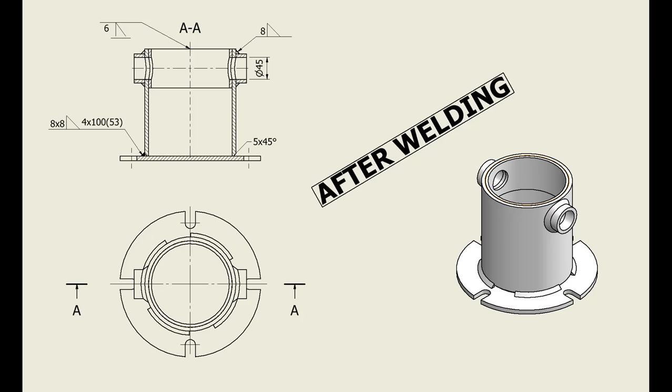Hi my friends, today we'll discuss welding.

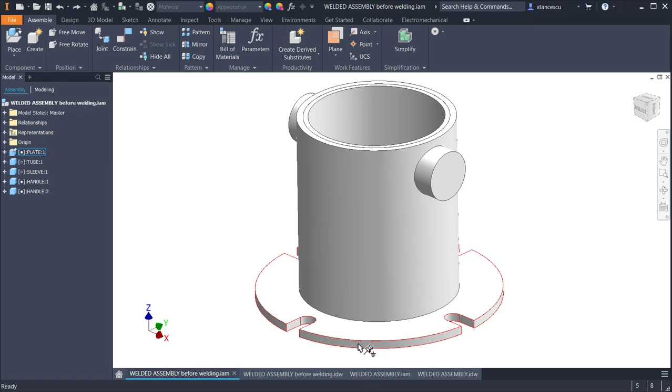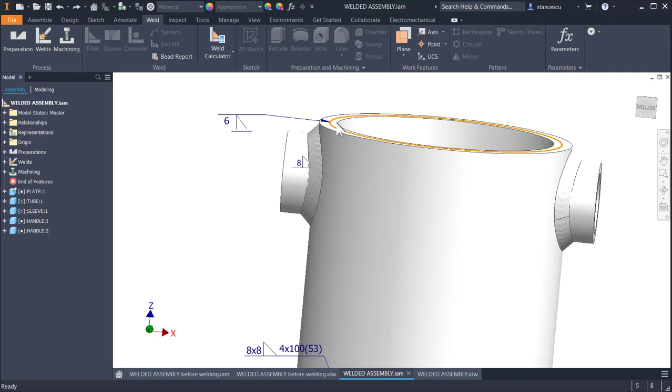This is an assembly which needs to be welded, and the final will have this welded assembly which has some welds at the bottom, some welds here, and a cosmetic weld which doesn't add material to the assembly.

The drawings are two: one is before welding, this one, and another is after welding. The assembly has 5 parts: a plate, a tube, a sleeve inside this, and 2 handles.

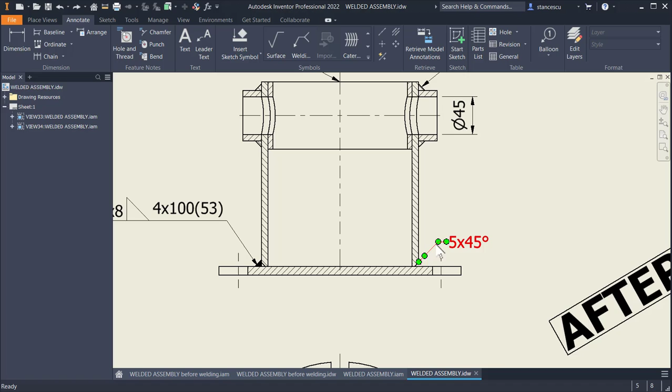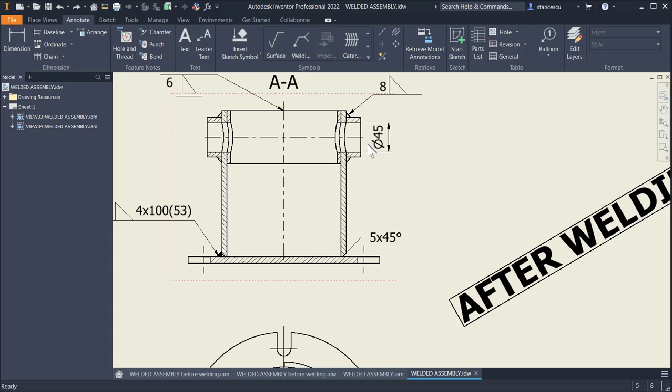I want to show you that we can apply preparation of the parts before the welding, and we also can apply machining after the welding. So we have 3 possibilities: one is preparation, another is welding, and the third is machining. We'll see how to make all this.

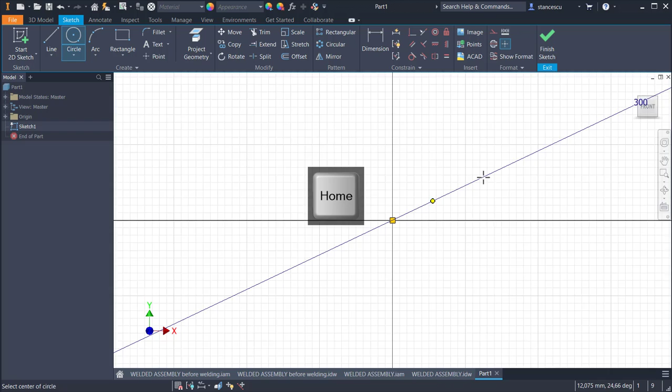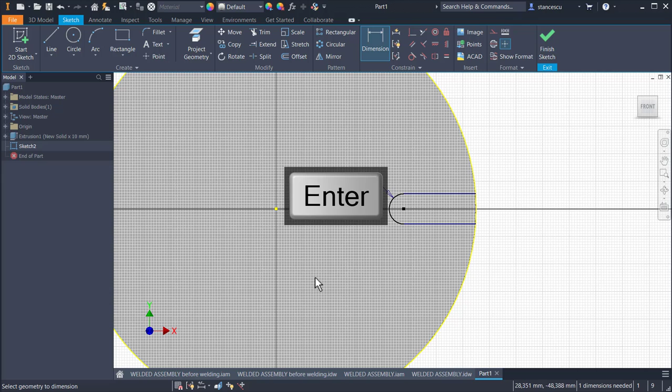Let's start with creating the components. Dimensions are here, so we can start. We start with the plate, and I'll go speedy to this part. You see, I create a circle, I extrude the circle on 10 millimeters, then I apply a cut by using the dimensions in the drawing, of course. 22 divided by 2 is the radius. Four cuts are there.

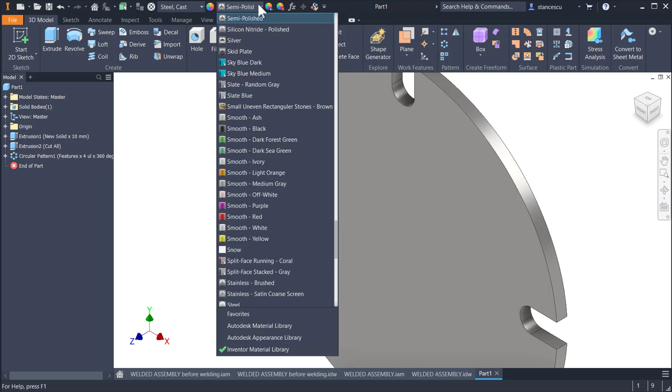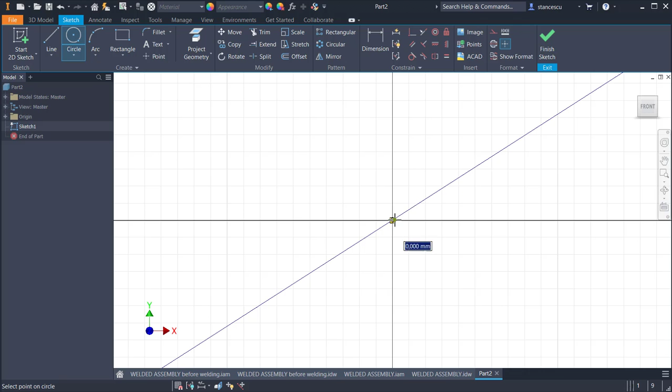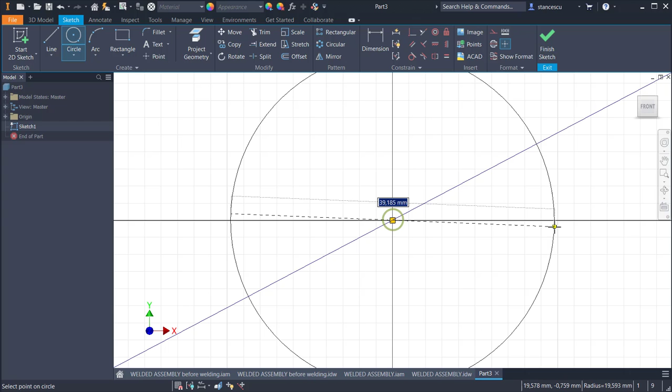Then I apply the material, which is steel cast, to both material and aspect. I create names for each of the 4 parts. One is in 2 instances, the handle. I create the parts with names having the suffix after, and this is not after the welding, but after we have created them, because the names plate, and not plate after, for instance, were the names of the demonstration

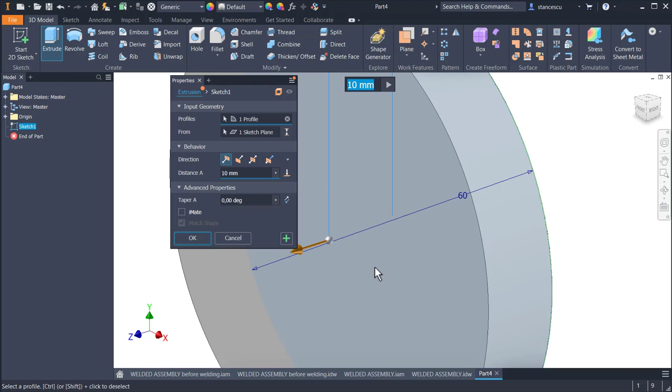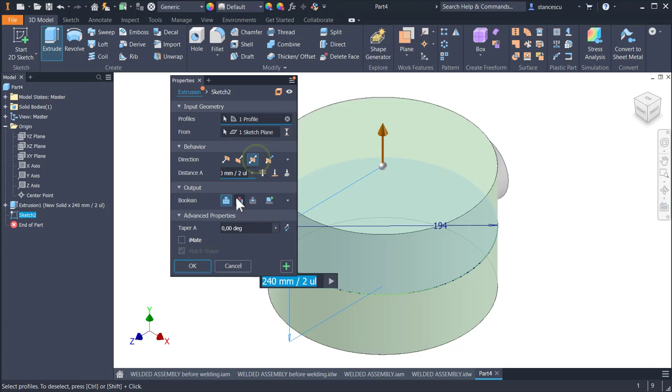assembly at the beginning. You see, each one has the name after: sleeve after, handle after, plate after, and tube after. All of them will be used to create a new assembly, which is also called after, but this is not connected with the welding. This is before and after we create the components and the assembly. You see, the handle has a curved face.

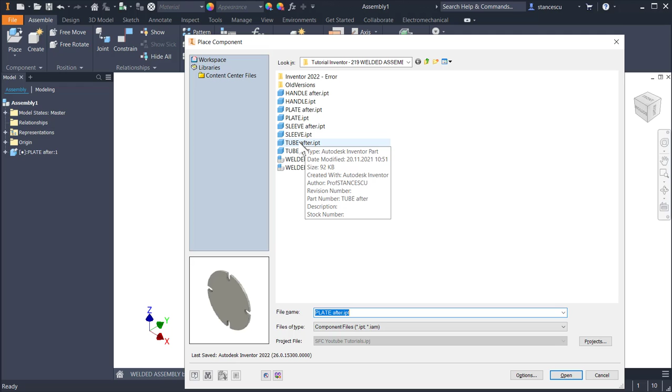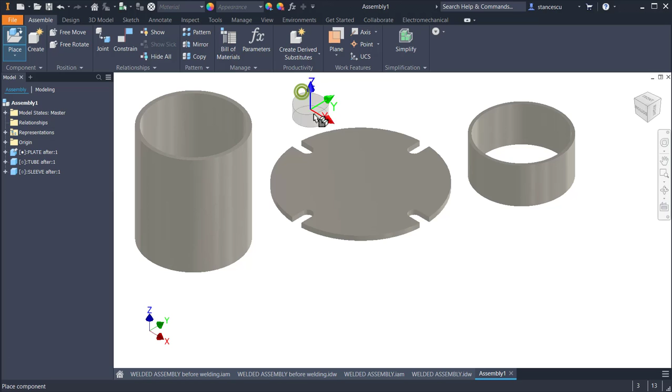Now we create the assembly. The assembly is this one. We start with the standard millimeter IAM. Place. The first is the plate, but the plate after we created, not the plate used as a demonstration at the beginning. Plate after. Placed, grounded at origin, escape, space, because I want to repeat the place. Tube after, somewhere outside of the plate. Escape, space. Sleeve after, escape, space, and twice for the handle after.

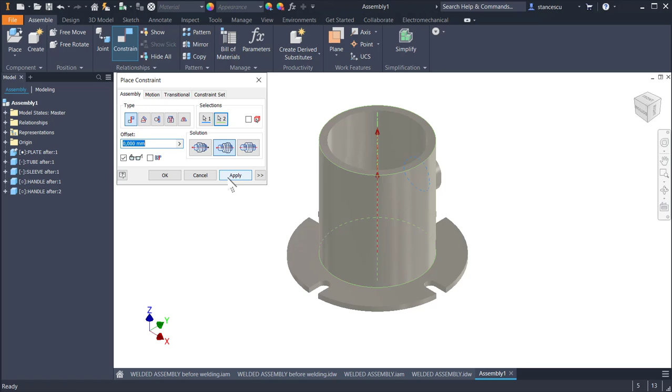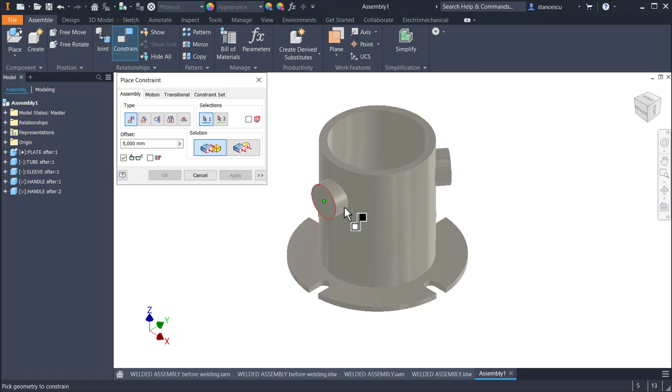We apply constraint, insert bottom face with the plate, apply, then aligned for the sleeve inside the tube, then mate the axis on axis, apply, then axis on axis, apply. As you can see, these two are on the same axis with the tube. I place them on the same axis, this axis, to be aligned with this axis.

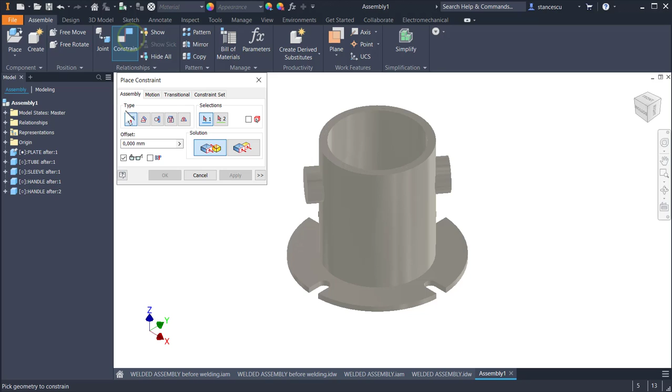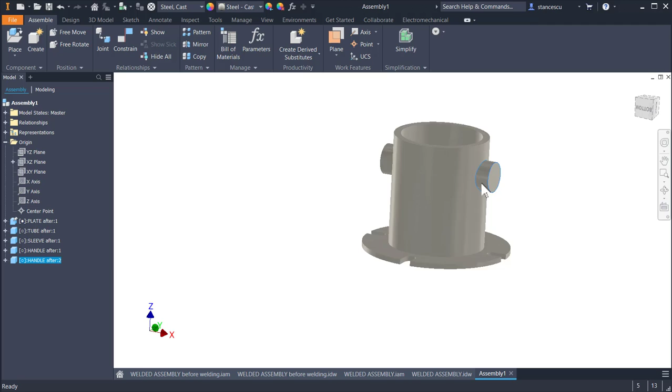Now we have the two very well placed on the tube. I put them aligned with this plane, so I apply constraint, selecting that plane. This is the plane, and then I select the point. Yes. Okay. What do we have now? We have the handles placed aligned with the plane. The drawing shows us the distance. The distance is 190. Be careful, I added this 80 because it was mixed up by me. Excuse me. So 190 from the bottom.

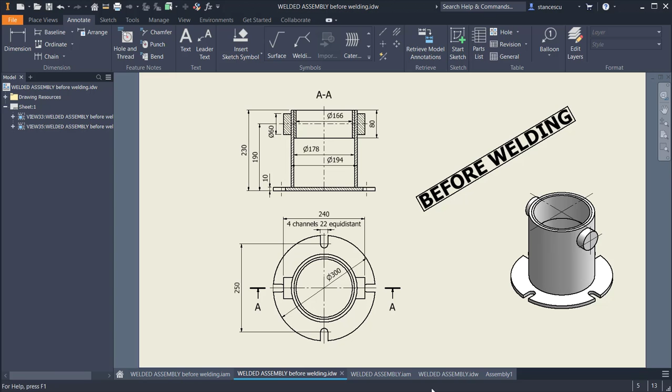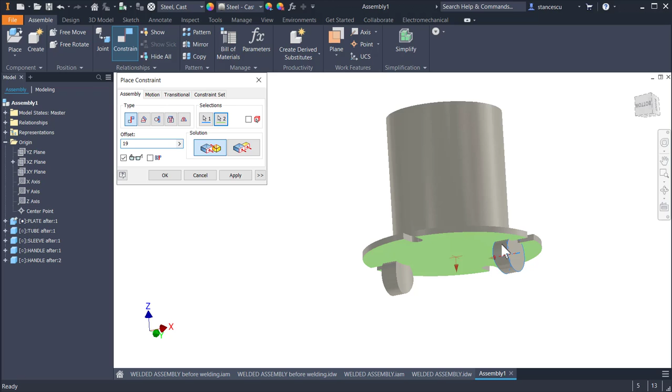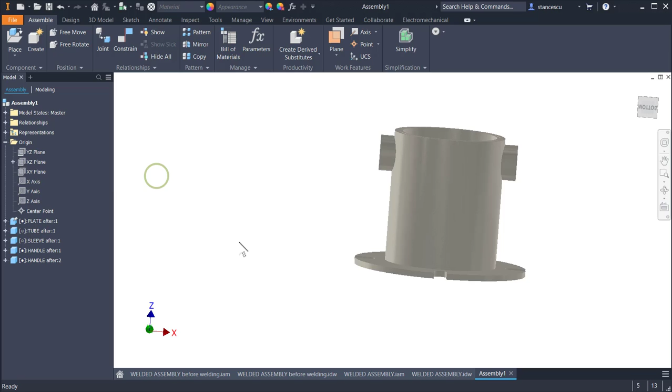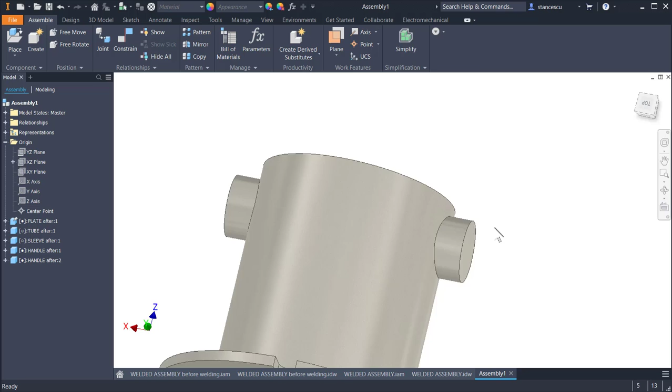I go to the new assembly, constrain this axis about this face at, I write here, 190, and I see that this is going down. I don't want this. I go back here, home, minus, and now the dimension 190 is up. Good. F6. I like to see the edges, so I go to visual style and I select shaded with edges. Now we see edges. This is the assembly to be welded.

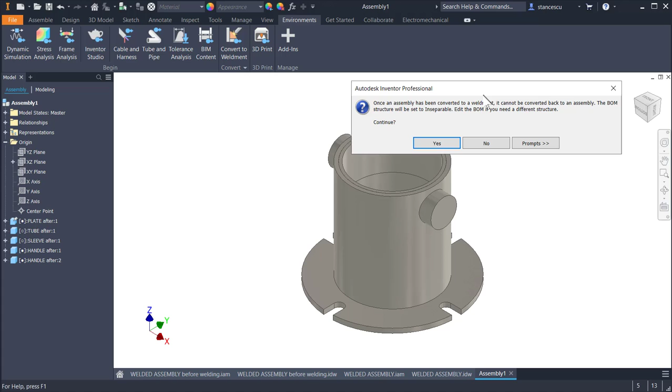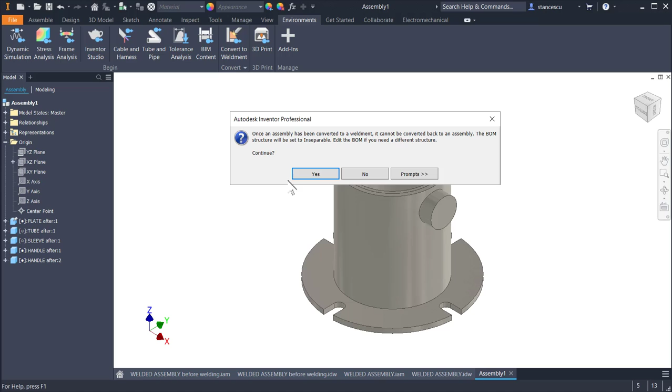Good. Since we have the intention to weld these parts, we go to Environments, convert to Weldment, and we receive an important message. Once an assembly has been converted to a weldment, it cannot be converted back to an assembly. The BOM, bill of materials structure, will be set to inseparable. Edit the BOM if you need a different structure. Continue. Yes, I want this way to convert the assembly to a weldment. Yes.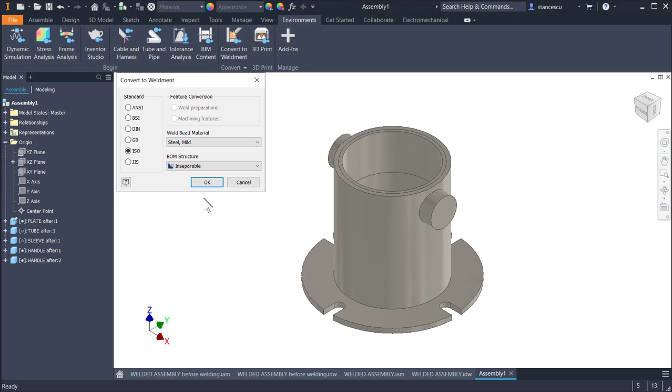What material for the weld bead do you want? I want ISO and I want steel mild. Not aluminium, not alloy, steel mild, usual for carbon steel. The BOM structure is inseparable. You can select other options, but inseparable is our option now. Okay. Now we have the tools for welding. As I said, the most important are preparation, welds and machining.

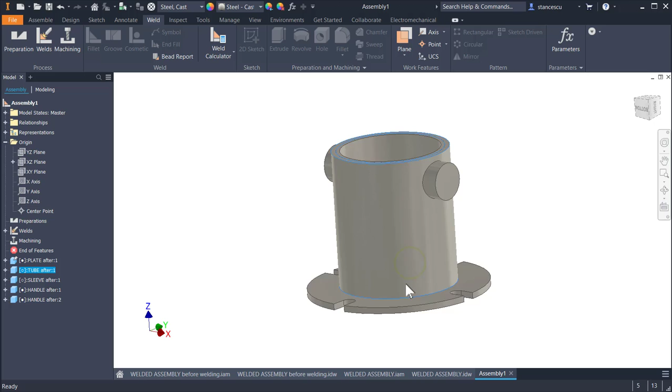I want to chamfer this component, the tube, at the bottom with 7 millimeters. So I select preparation. You see that we now have an end of features here. So we create features between these two lines in the browser. What do you want to do? I want to create a chamfer. Which edge to be chamfered? This. 2 millimeters? Not 2 millimeters, but 7 millimeters.

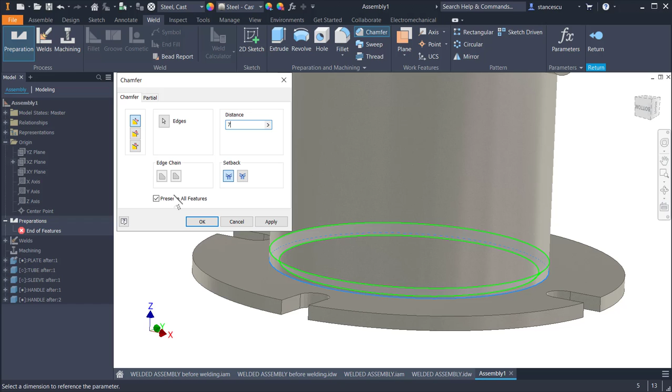Okay. Now, as you can see, I have a part with the chamfer. Do you want to create some other preparation features? No, this one is all I want. Good. Then I go back and I select welds.

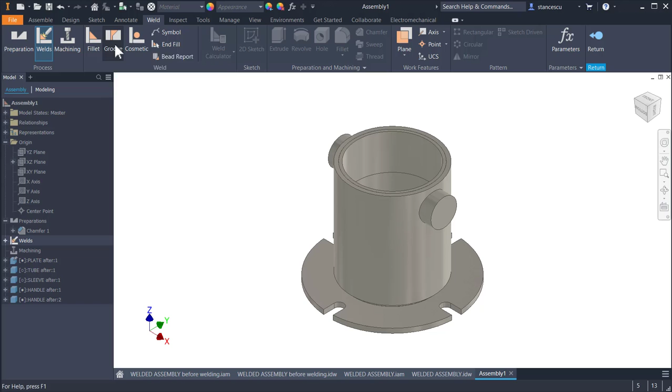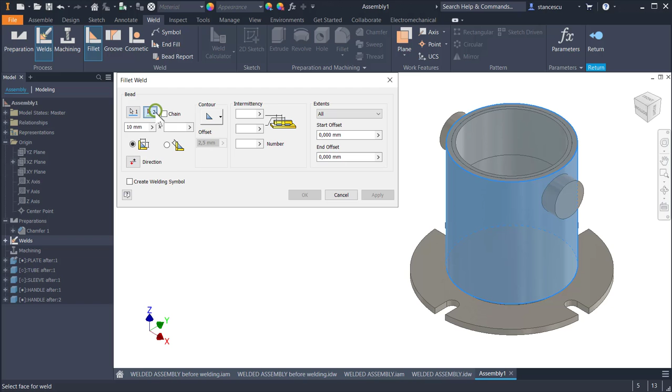I have now 3 options: fillet, groove and cosmetic. I select fillet. Why? Because I want to apply weld between this face and the handle. One selection is the first face. The other selection is the second face, but both of them can be more than one. One face, one component is number 1 set and it is selected, and the second one is this and this.

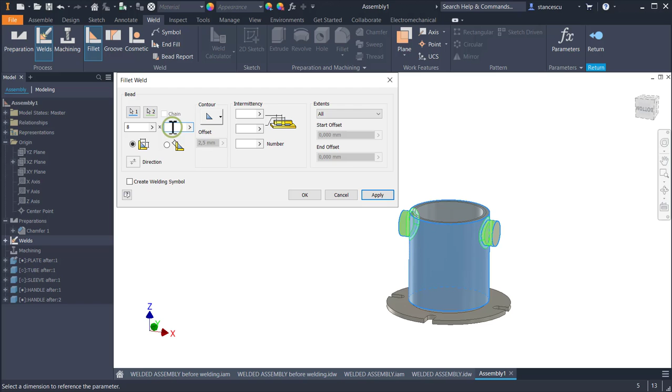So we have 2 faces for the second set of faces. Good. Now I place here my dimensions, 8 millimeters and also 8 millimeters. The other one, not 10, it was too large. The first.

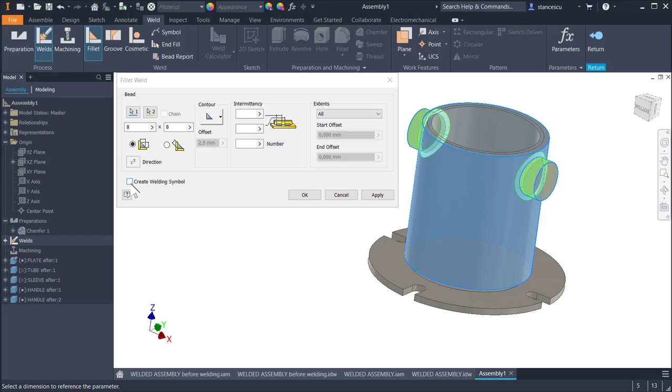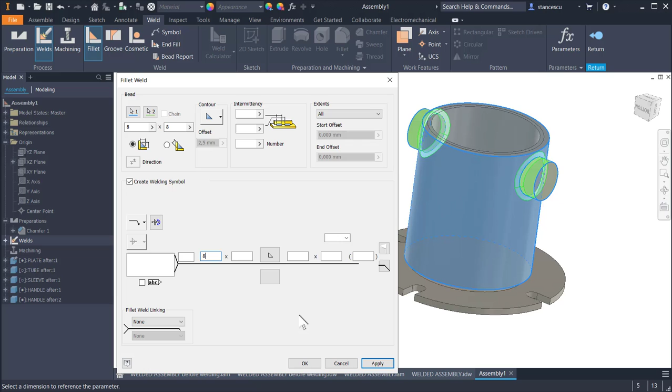And I want to create also symbols for my weldings, or welds. Create welding symbol. I place here 8, and this is enough for the fillet weld. That's all. Okay. You see, we have a symbol here, and we can use this symbol in the drawing when we create a drawing for the welded assembly. Good.

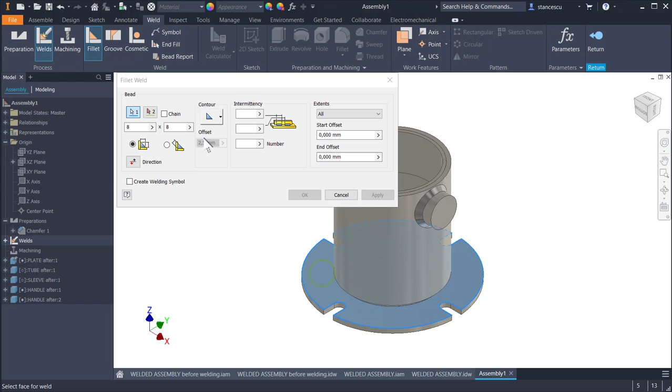Do you want to create another weld? Yes, sir. I want to create a weld at the bottom, not continuous, but intermittent. What kind? Fillet. Good. I still leave here 8, but the first face is this one. The second face is also only one face, this one. And now you see the future weld. I said that I want it to be intermittent. I place here the length of each bead,

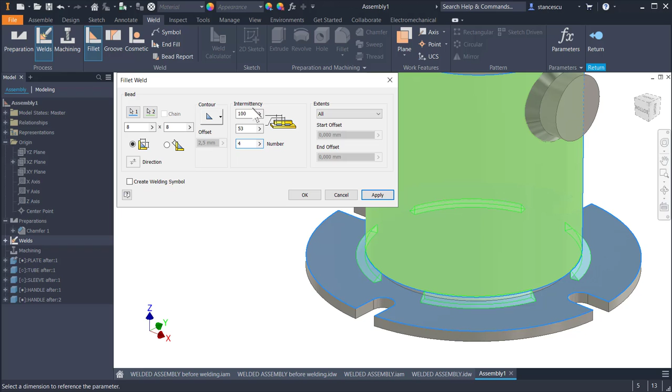53, not 100 is the first, 53 is the second, and the number is 4. I want to have 4 weld beads. Length is 100 and spacing, the space is 53. Symbols, yes, I want to create symbols.

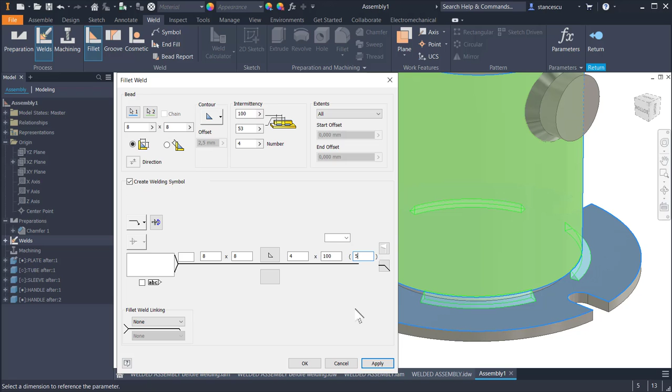I place here 8, also 8 here, then 4, 100 and 53. Okay.

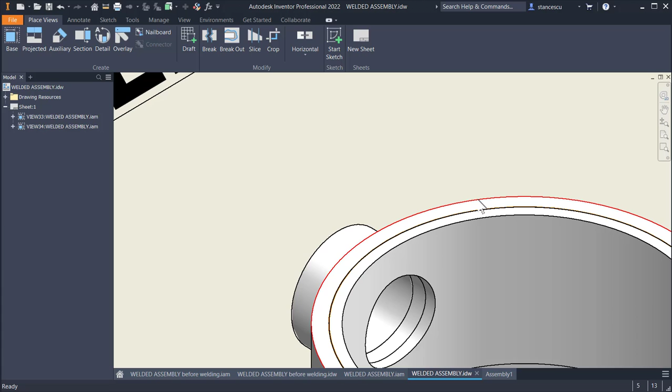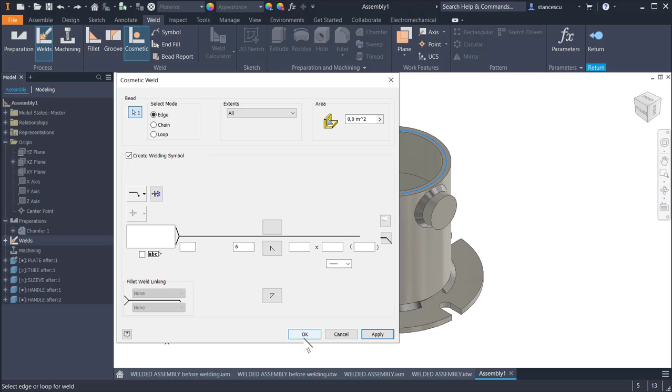Next is the cosmetic weld, which is this one. You see, here is a special weld. To do this, we select cosmetic, the third option, and an edge, this one. But we want to create also a welding symbol. The welding symbol has none up, but a symbol down. This is the symbol. The value is 6, chamfer, and another option is a simple line. Okay, we see that we have a new symbol and a new weld.

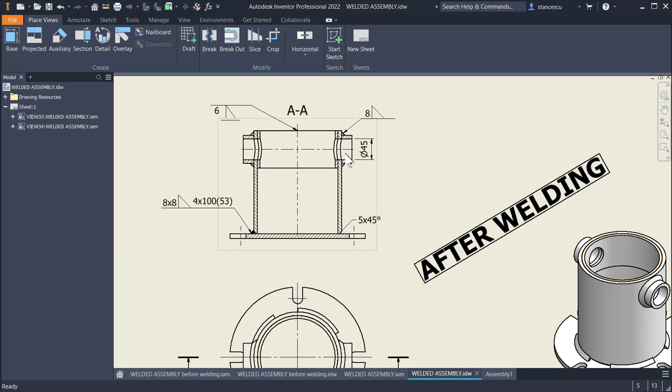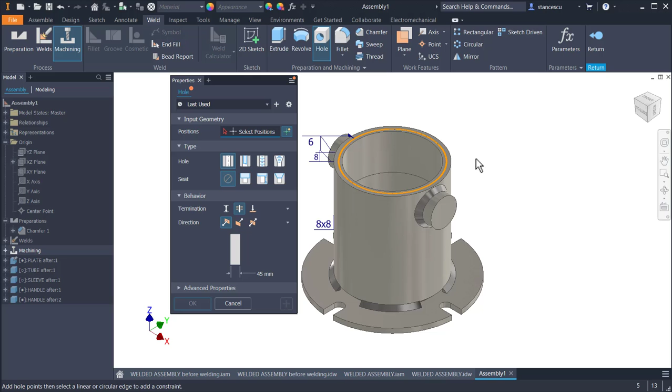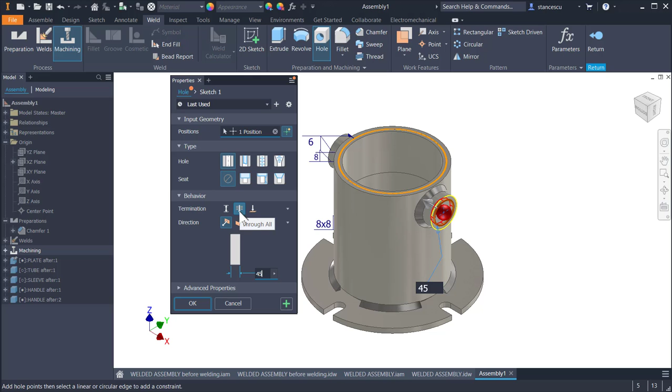We finished the weldings, and now we go to machining, the third stage. Machining is this 45 hole, nothing else, but the hole is through all the part. To do this, we use the tool hole by selecting this face, concentricity, the diameter of 45, it is already selected, and through all. Okay, you see now we have a machined feature.

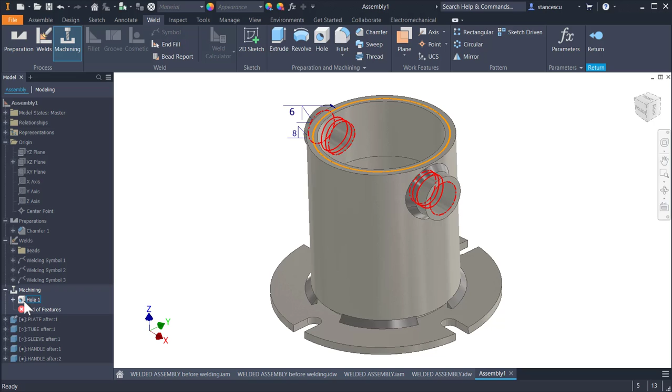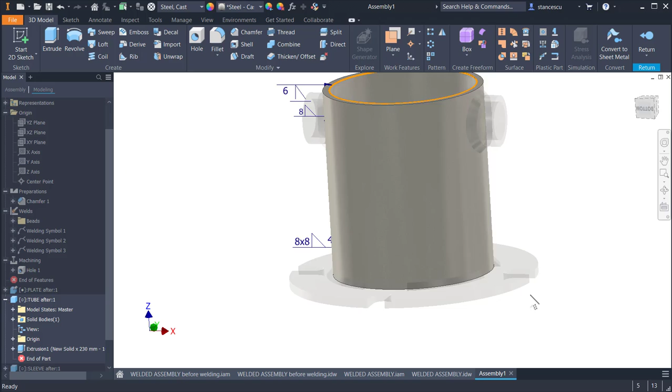Again, this is another section. You see there are 3 sections: preparation with a chamfer, welds with 3 welds, and the new machining. That's all. Return. And now if we want to see the parts and we double click any one of them, like this one, we see that it has no chamfer and no machining.

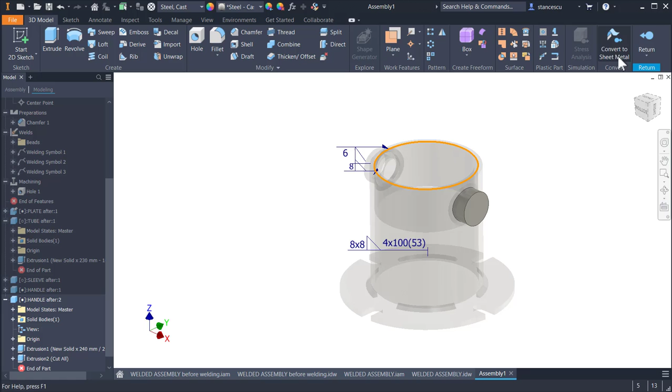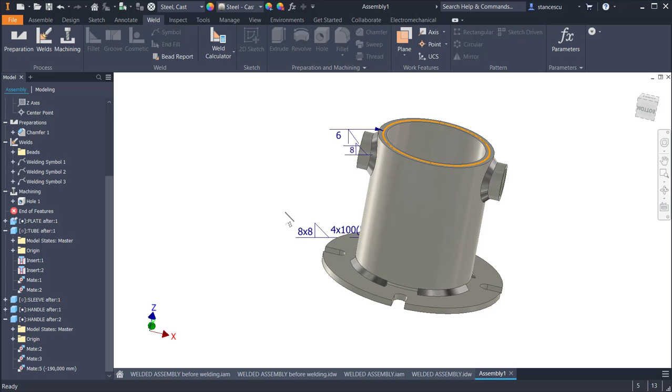Yes? What does this mean? This means that we altered the assembly, not the part, by using these preparation and machining tools, but they don't affect the components. This is a unique object with these characteristics: welding, preparation, machining, but the parts are the same.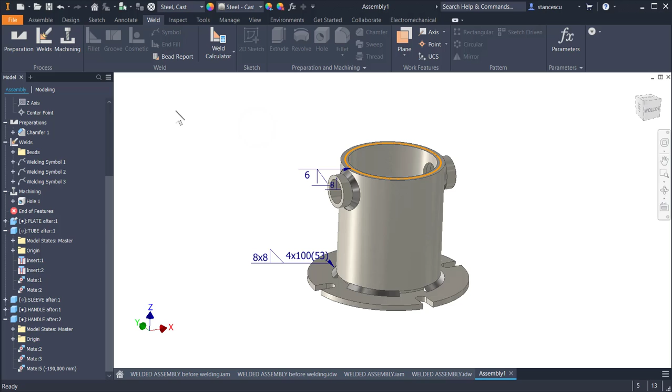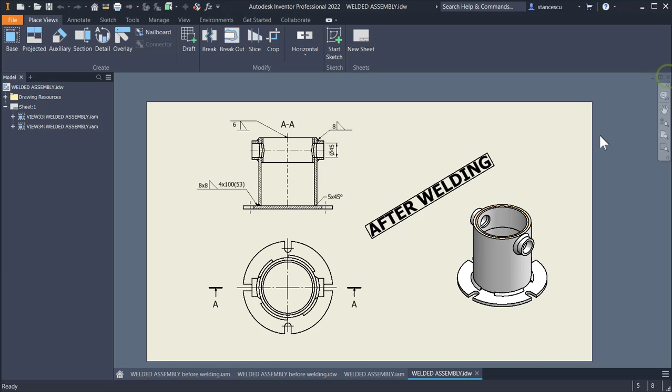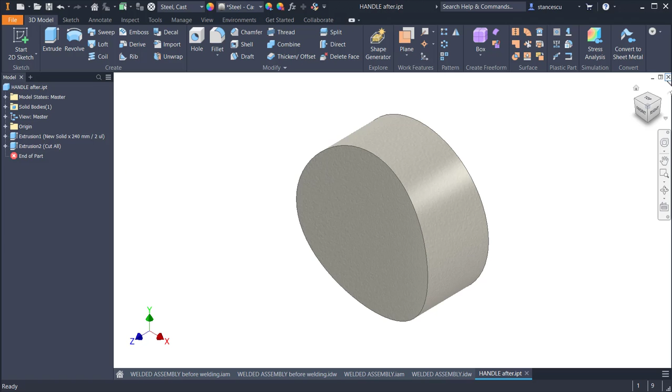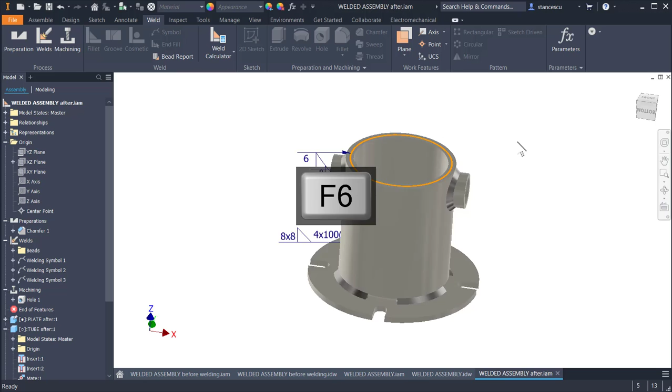For you, I save this as a welded assembly after. Save, and now I can open each after part. For instance, handle after, which has no hole inside. Yes, it is part of this assembly, the last one, but it has no holes. You can use the parts to make some other assembly, but this assembly, open the welded assembly after, is as you see with all those characteristics.

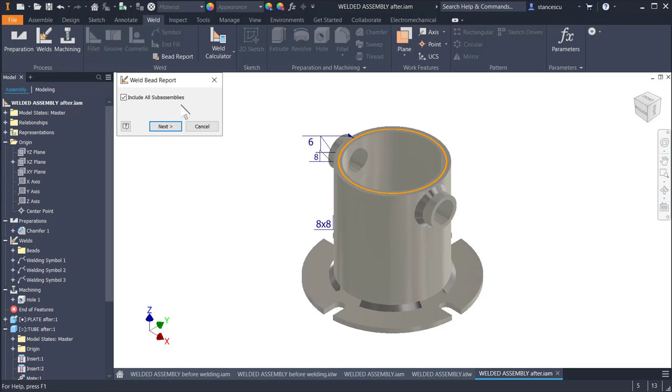We can use now this tool to obtain the material which was consumed. I already saved this. I'll place here again after, save. Having this, we can open the Windows File Explorer and double click on the new weld bead report to see data. As you can see, the name of the assembly: fillet weld 1, fillet weld 2. The first is simple, the second has some interruptions, and the cosmetic weld, which has no deposit, no mass of the material.

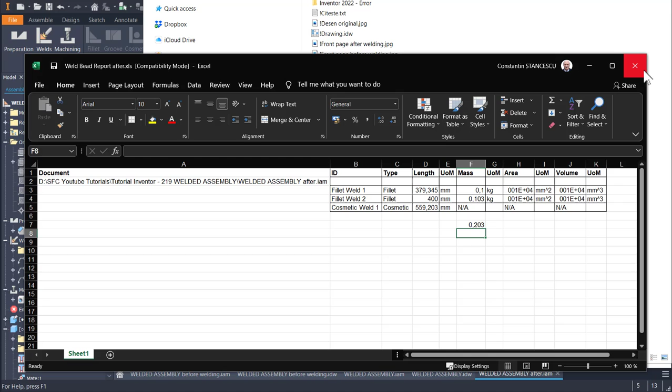You can make calculations here. For instance, you can place here the sum of the masses. Oh, I made a mistake. Sum of the two. And now we can have a lot of welding, and we have the mass of the necessary material for creating the weldment. You can find the volume and so on. Good. Save, back.